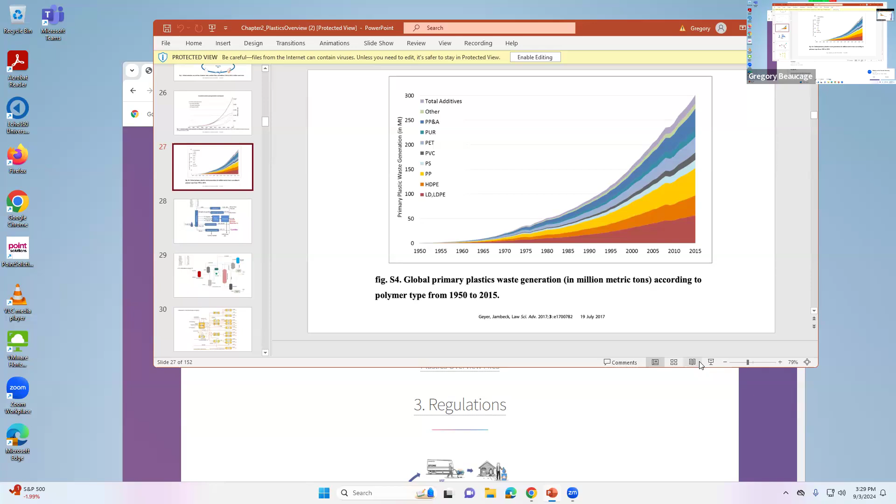So yeah, Anna Burke wanted to talk about a club for sustainability. I forgot the name already. They're having a meeting tonight, and it's free pizza. But no beer.

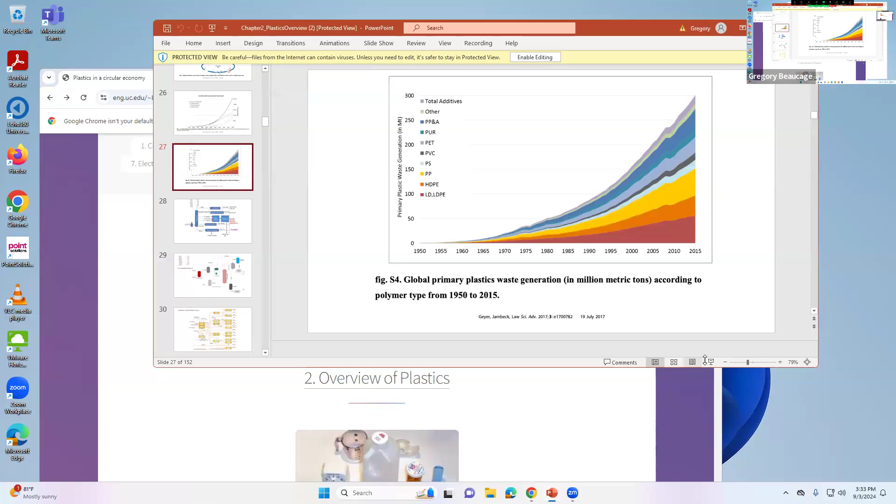All right, so I wanted to do a section overview of plastics. This is the map of the total plastics production, and it's mostly polyolefins.

So a week from this Thursday, Brian Brees is going to come in from Lyondell and talk about polyolefins. I'm going to go through a little bit before that so you know what's going on. And then we'll have a tour of Lyondell at some point pretty soon.

And the Rumpke tour for recycling is October 11th, a Friday at 1:30. But they shut down at noon on Friday, so it won't be operating. As a negative, you don't get to see the stuff flying by, but the positive is you can actually hear the guy, because it's really noisy - seems semi-dangerous since it's an active assembly line. So there's a negative and a positive to having it shut down when we go there, but you can still see quite a bit, I think.

All right, so what I want to do is go through the types of plastic. Again, the polyolefins are going to be the majors - low density polyethylene, high density polyethylene, polypropylene, all the kind of yellowish, reddish colors and all that.

PVC is also more or less a polyolefin, so that adds on to that. You can see it ends up being supposedly 80% of the plastic waste. I think that's because it's only like 50% here in production, since the other polymers are all high turnover packaging materials, less than a year probably, and then they're thrown into waste or recycled. The other polymers, like polyurethane, are used for insulation and coatings and things, so a lot of it doesn't get to the recycle stream.

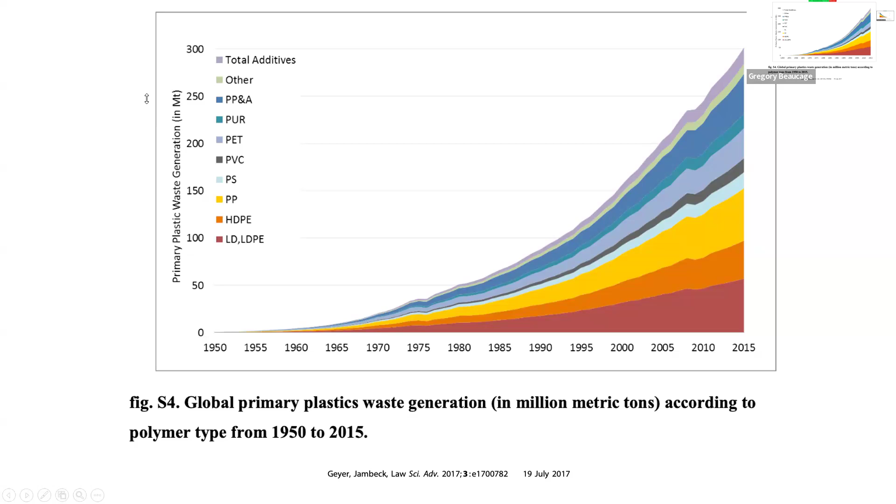What I wanted to do this week is give you—I already went through the petrochemical sourcing for the monomers, basically a catalytic operation to make olefins. Then the olefins are processed to make things like diamines and dialcohols to make condensation polymers like nylon. So basically, olefins are the feedstock to a lot of the different kinds of polymers. It's the same picture: crude oil to kerosene, then cracker to make olefins. So a split of the oil production is being cut off to make plastics.

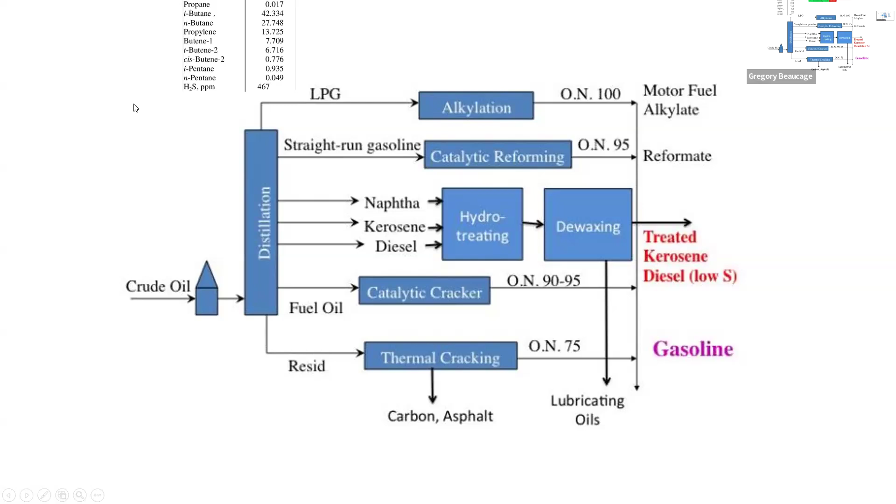In other words, if we continue to use gasoline, we're going to have these cuts. We can adjust it a little bit, but basically you're going to have material that'll make monomers for polymers. You have to get rid of those monomers somehow if you're burning gasoline, right? So that's something to think about—just getting rid of plastic isn't necessarily solving the problem totally.

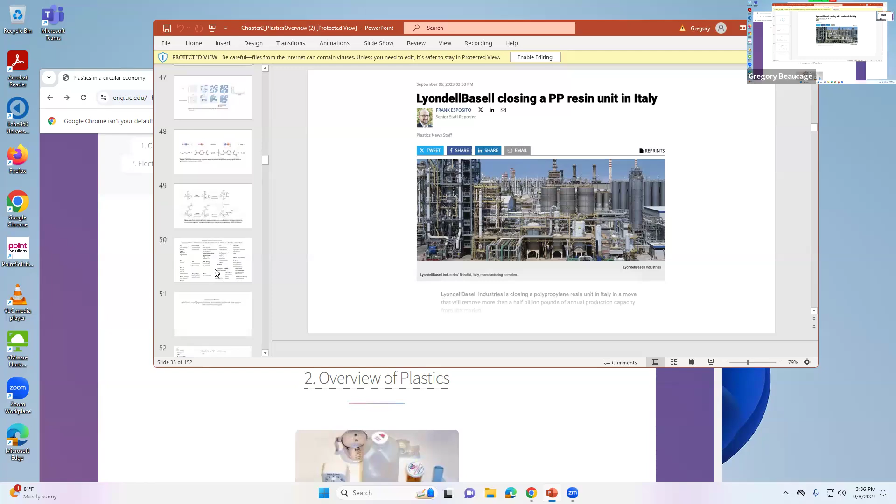Let's see, 50... so anyway, this is off the top of my head, the 21 plastics—I think it's probably fairly comprehensive, so it's a lot. I'd like to go through each one with at least one slide to say how it's made, how it's processed, how it's used, so you have a rough idea of what the picture is. But again, the main things are going to be polyethylene and its different manifestations, polypropylene, and PVC—these three are 80% of what's going on.

PET is the number one that could be recycled—that's like 16% of the waste stream. Polystyrene is not recycled. SBR, the rubbers, are recycled as grind for reuse in a lower grade use. Polyhydroxybutyrate—these are supposedly biodegradable polymers, and these things are not recycled. Pluronics and the other water-soluble polymers, all three of those, and I think most of the other things are not recycled at all, right?

But they're also not used as much, right? These are like electronics polymers, the thermoset polymers that react and become permanently cross-linked material. I didn't put polycarbonate down—I'll have to mark that in. Polycarbonate is a condensation polymer too, and it's not recycled. It's not reused either, because most of it, like if you have a hard plastic such as polystyrene, it's mostly used because it's clear, right?

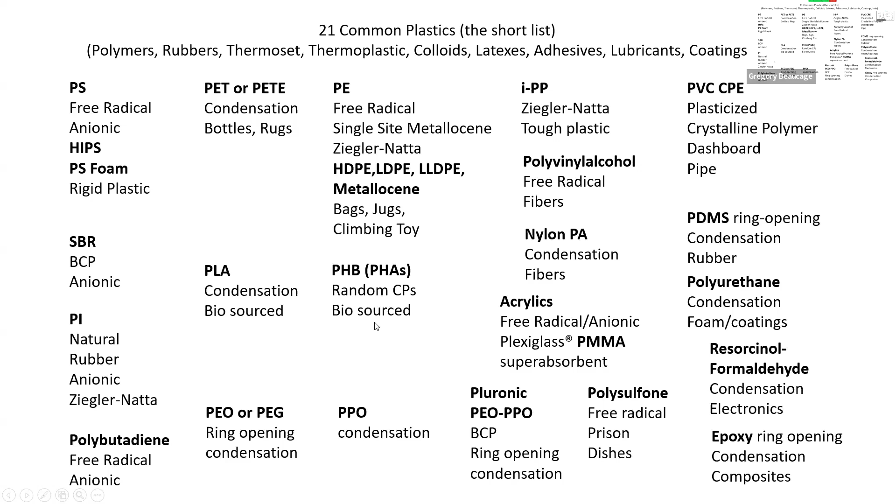Anyway, the acrylic, some of these I haven't gotten to yet, but I have the whole thing. Then the additives are going to be a ton of additives too. Not sure how, it seems like when you go to the different plastics, you're going to have certain ones, like for polyurethane, for SBR rubber, carbon black and silica are the additives they use mostly. And then calcium carbonate's dumped into everything.

So there's a company in Cincinnati that's a Swiss calcium carbonate company. What is it? Yeah, Omya, yeah. They work there, they go over like... oh okay. Yeah, we could get someone from there to talk, I guess, but I have one of my grad students who works there, he's in the analytic thing there. Anyway, it's a good company. Swiss is always good because they have so much money, it's like the money place to go.

Anyway, Titania is like Evonik and DuPont. So big companies make all these additives too, made in train loads. They become kind of a problem when you try to recycle things because you don't want to have additives in the material recycling. So separating the additives from the polymer is a big problem, so knowing what those are is useful. I'm not exactly sure how I'm going to go about talking about additives, but mostly I'm just throwing it in with the polymers so far.

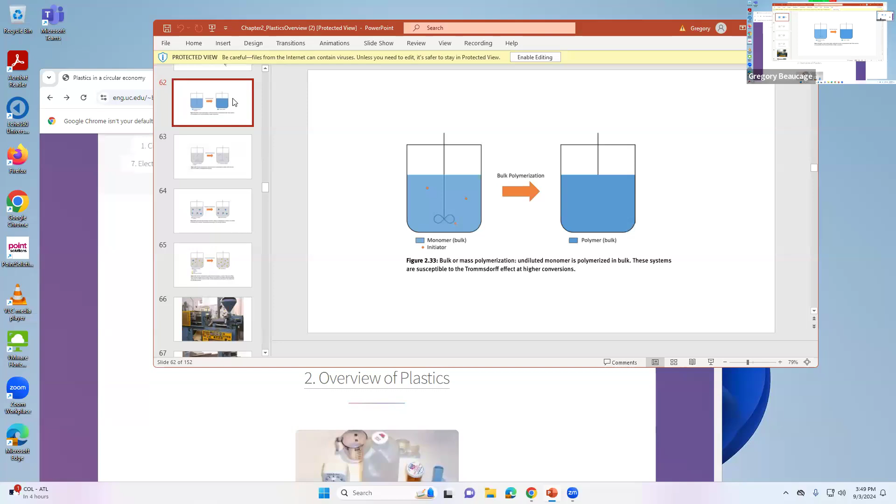But anyway, there's a picture of these kinds of polymerizations in here. Let me see—I should have put it right here. So I'm on page 62, here. This is one of them, showing one of the pictures of this. This is showing bulk polymerization.

Again, the Trommsdorff effect is the problem here, which causes a reversion of the polymerization and limits the molecular weight you can make. This is a solution polymerization where you put in an oil so you end up with droplets of the monomer surrounded by oil. The catalyst, the free radical agent, is put in, then diffuses over to the droplets surrounded by oil, and it ends up making polymer droplets from these large pellets.

Or that's suspension—what is this one? Solution is where you dissolve the polymer in a solvent. So you wouldn't do that with polystyrene because you'd have to use something like benzene to dissolve it, so it would be a mess, right?

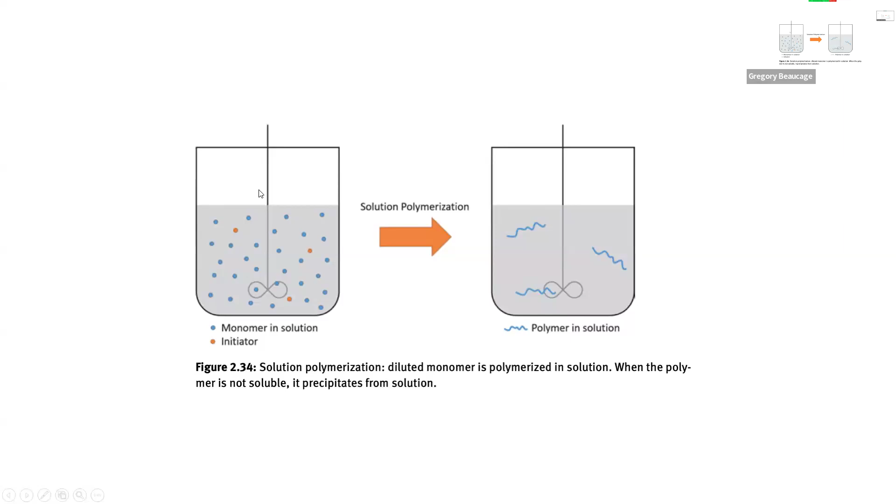But usually you want to do this in water. Water is a good heat transfer agent, it's not toxic, it's got some advantages—you can recycle it in the system, and you're not going to have fumes coming off this. So it's nicer to use water.

And there's monomer droplets with initiator, and there's something that makes the droplets stabilize—basically like another polymer.

Then emulsion is a little bit more fancy. It's just like suspension polymerization, where you have droplets in the water, but the surfactant you put in, the soap, makes these little micelles that are maybe 100 nanometers in diameter, really small. So you have big droplets that are like 100 microns or larger, then micelles 1,000 times smaller. The monomer diffuses from the oil droplets through the water to these little micelles.

And as it's depleted, as the polymerization goes along, the catalyst is also in the water, so it also diffuses into the micelles. There are whole equations to talk about this kind of emulsion polymerization.

They call it emulsion, but it's really a colloidal polymerization because these are colloidal droplets. Emulsion is something more like this oil thing where you put oil in and stir it up. So there's a difference between emulsion and micelle, but it was misnamed emulsion when they first did it, and they just call it that. It's really a colloidal polymerization.

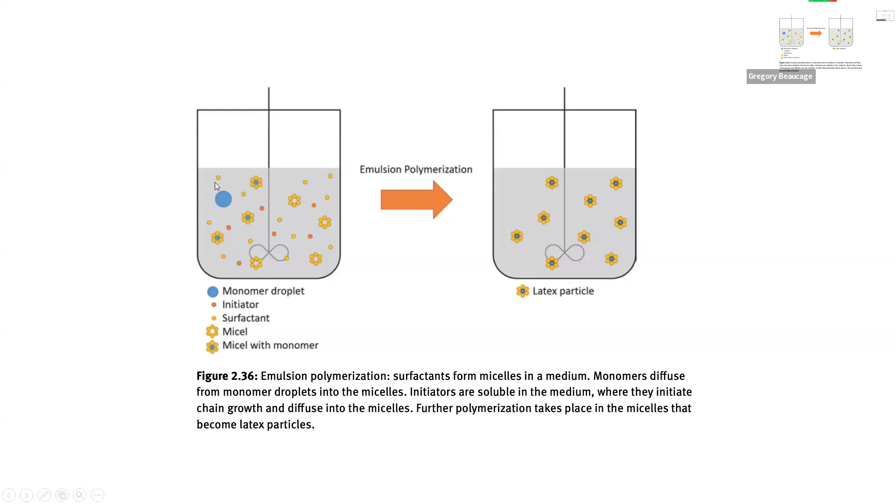If you want a standardized size, they're all exactly the same size. So if you want to use it on a microscope to scale your images, or use it in light scattering to see what sizes you're picking up, you can sprinkle some of that in. A lot of analytic standards are made that way.

So those are three ways to make polystyrene, or I guess I should say colloidal polystyrene. There's a picture here: basically a monomer droplet, and the monomer diffuses to these—there's an order of magnitude difference in size. The initiator is floating around, also goes there, and then it polymerizes.

Again, with these beads you can make a colloidal crystal—this is a hexagonal, like an FCC crystal, of those beads, because they're all exactly the same size. All right, so that's kind of in the wrong place.

But anyway, the free radical polymerization of this stuff is going to give—this is a GPC curve of this. Basically, there's a picture of the GPC in here too. The order of this isn't great.

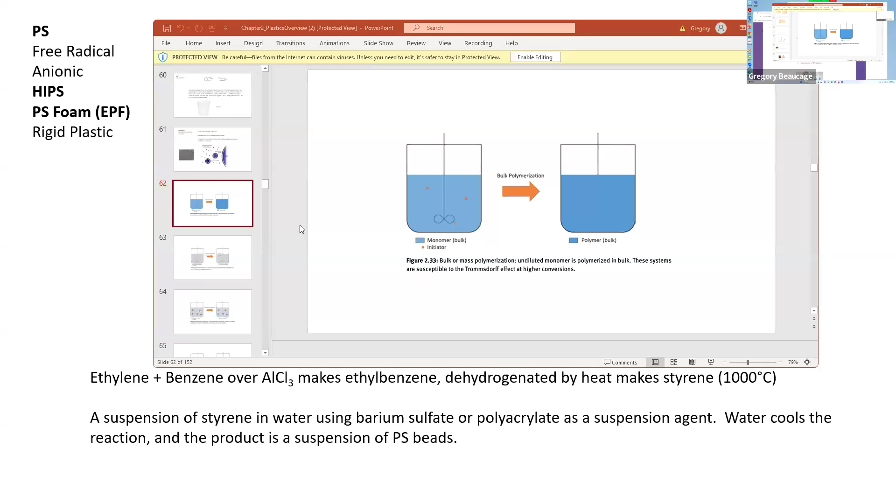So it's not very exciting on a DSC—differential scanning calorimetry. It's a differential between an empty pan and the other pan, measuring how much heat it takes to reach a temperature. When you get to the melting point or crystallization point, it releases heat, so you get a dip; when it melts, it consumes heat, so you get a peak. Basically, dips and peaks mean you're going through melting or crystallization.

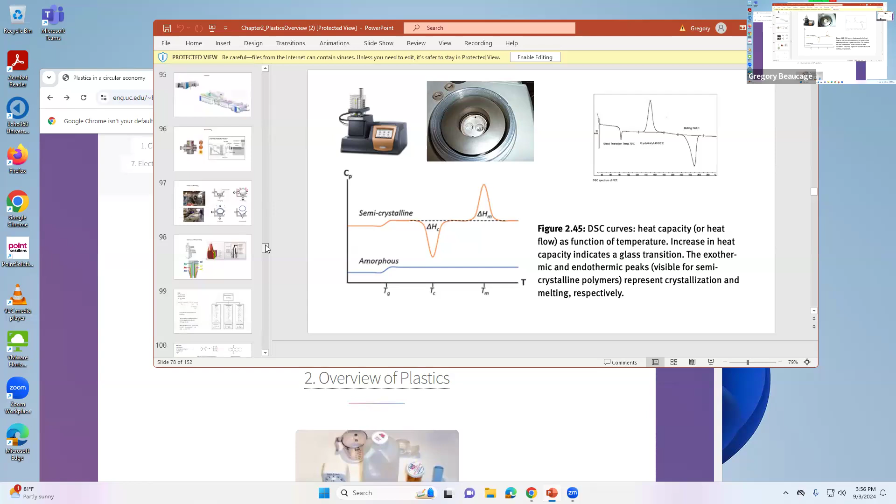So anyway, back to this. Oh, that's a GPC—sorry, that's a DSC, I want a GPC. GPC, I had in here somewhere too. Sorry about that, that was the wrong machine. This is GPC.

GPC is a column made of a polystyrene gel. You take polystyrene and cross-link it with divinyl benzene. Styrene is a benzene ring with a vinyl group on it, unsaturated carbons. If you put another vinyl group on the other side, you get divinyl benzene, which if mixed in with polystyrene, polymerizes just like polystyrene, but it has an extra vinyl group sticking off so it can make a network, making a cross-linked polystyrene. You just mix it in with the monomer.

If you take that and swell it in toluene, it makes a gel, a solid cross-linked gel. Put that into a tube about a couple millimeters diameter and maybe 10 centimeters long, then push through it at high pressure a dilute solution of polystyrene in toluene. The gel acts almost like a plug and won't move at all, so you crank up the pressure to about 50 megapascal, like 500 atmospheres. That's why it's called high pressure liquid chromatography. At that point, it's going to go through.

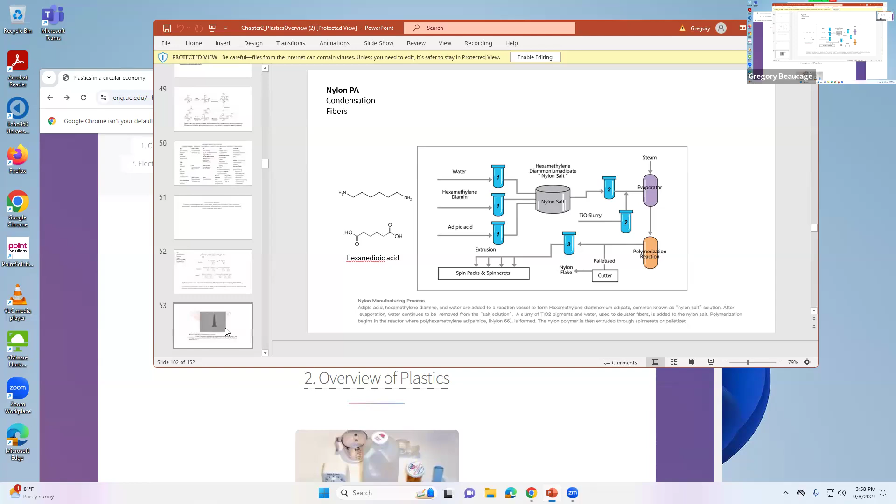From this you can get the mean value, like the second moment, and you can get higher order moments because you have the whole distribution curve. You end up with the weight average, which is a ratio of the third to the second moment, and the number average, which is the mean, the second moment divided by the first. In other words, the average of molecular weight squared divided by the average molecular weight gives the number average, and the cube of molecular weight divided by the square gives the weight average, since the cube is the weight times the squared term, making it the mass average. The number average is just the squared one.

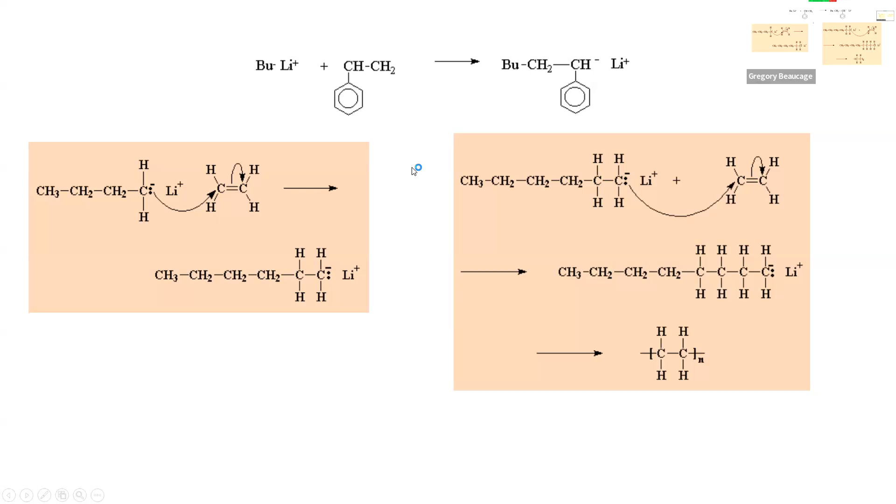So anionic polymerization, once you get anionic, they call it living polymerization, living polystyrene, because it won't stop. Once you run out of monomer, if you add more monomer, it will continue on. So here they made polystyrene, then they add butadiene, which is this guy.

So the butadiene's got two double bonds. It's butane, and diene means two double bonds in it. One of them will pop off here to the anion, and the other one will pop here into the middle. So you end up with an unsaturated chain, right?

So that unsaturated chain, if you put sulfur in, that'll cross-link. So if you want to cross-link rubber, you're going to have unsaturated bonds, and the sulfur will just break that double bond. It can bond with that and another one. So sulfur will make a bridge, and sulfur can bond with itself and make a chain too.

That's vulcanization. You just put the sulfur in, mix it up, heat it up, and it reacts with those, making cross links. However much sulfur you put in, the more sulfur you put in, the shorter the chains between the cross links that you get in a rubber. So this is SBR.

It could be a tri-block too. So you polymerize styrene, then you polymerize butadiene, then that runs out of butadiene, then you put styrene in again. So you get SBS, like a tri-block copolymer. You can make as many blocks as you want, tune it to whatever you want.

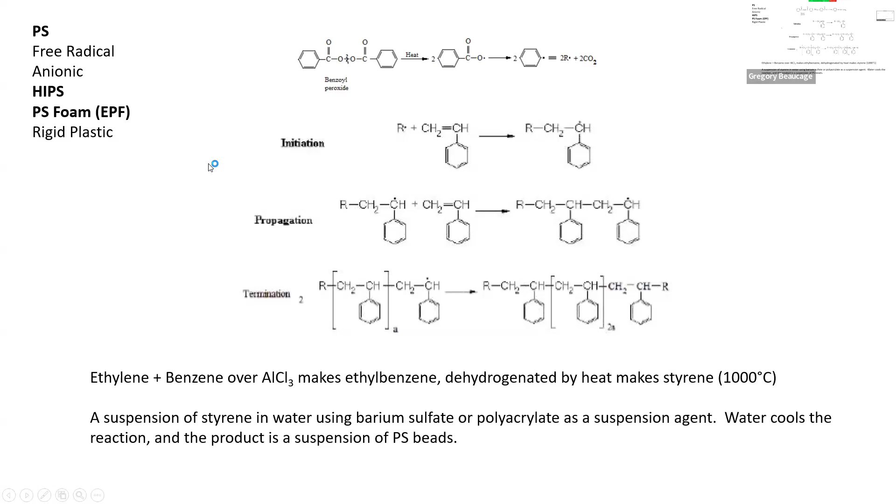So anyway, all you have to do to make styrofoam is heat it up, because there's still some residual styrene monomer in it, or you can soak it in hexane or some other solvent like that. You just put in a very small amount because there's a big change between liquid and vapor—a huge volume change. A little bit goes a long way.

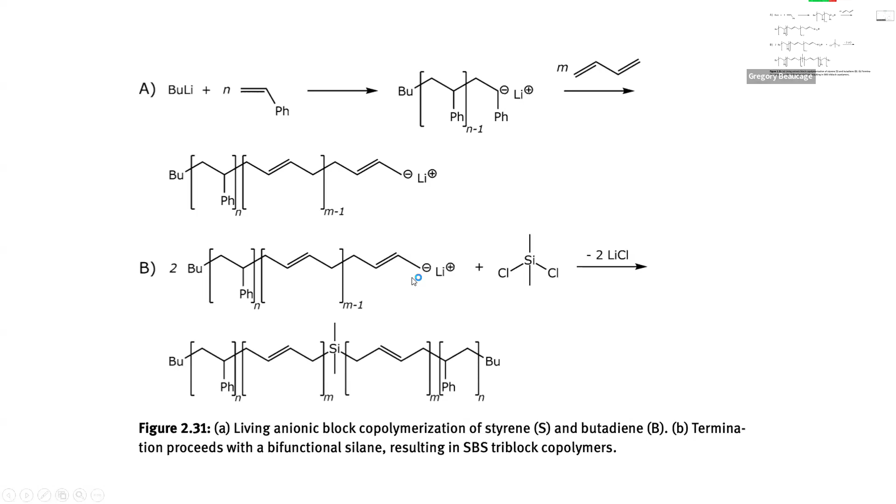So you're going to have some kind of... let's see, what is this one? Terminating with the bifunctional silane. This is when you want to terminate the anionic polymerization—you put this silane in to kill the reaction. This is the termination step. That's showing, in broad terms, what anionic polymerization would look like. This would be free radical. That's anionic monodisperse. This is block copolymer anionic.

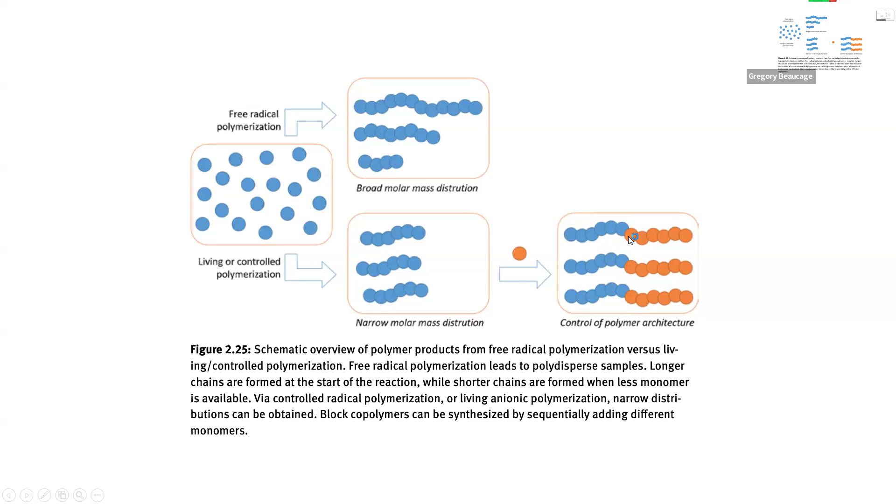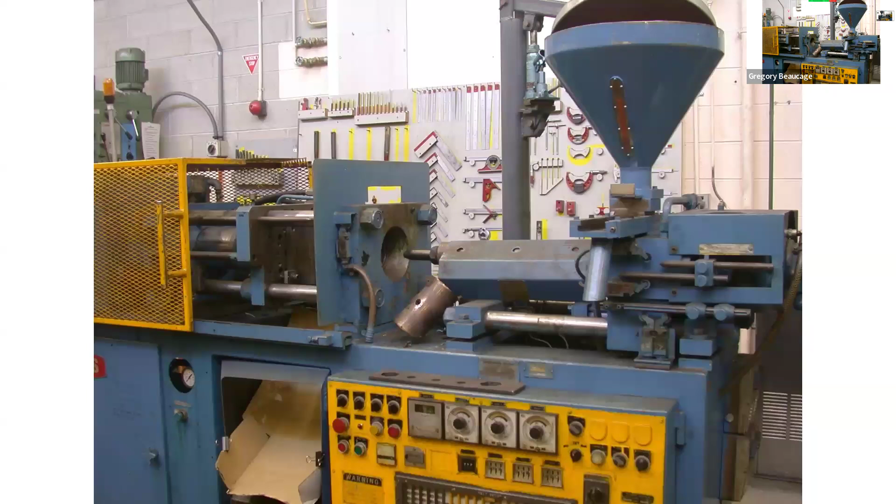ABS is the Lego bricks thing. So this isn't really recyclable. It's made by copolymerizing styrene and acrylonitrile. Acrylonitrile is this monomer—the C triple bond N sticks off, and this vinyl polymerizes, so you get this nitrile side group on it, which makes it tougher somehow, because I think it hydrogen bonds or somehow interacts with other groups.

And then they blend it with butadiene, the same thing as in SBR, where the double bond makes an unsaturated chain, polymerized with acrylonitrile, and you mix this stuff all together. So there's no possibility of recycling this. I mean, you could burn it or pyrolyze it to make oil or something. So anyway, that's ABS—a fairly complex process—and you end up with Lego bricks.

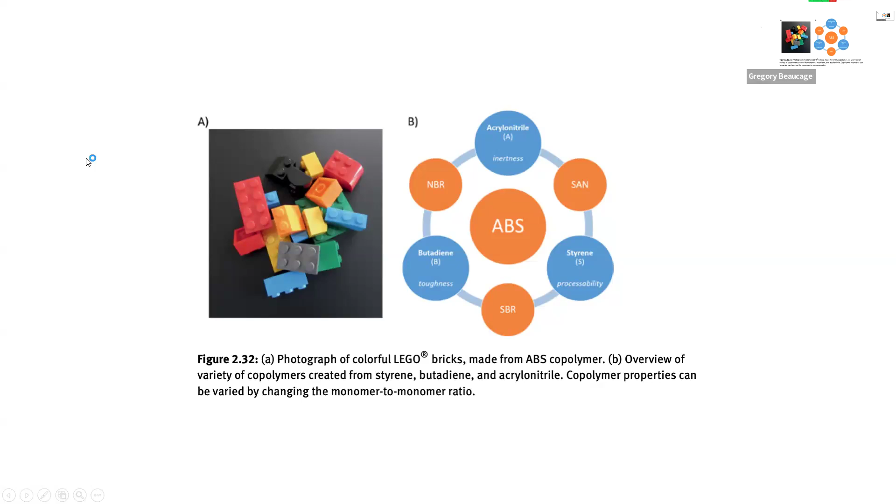Anyway, this is another case similar to ABS, but it predates it. ABS is from the 1970s-80s, and this HIPS is from the 1950s-60s, I think. This popularized a term called phase inversion. You polymerize styrene and butadiene together by free radicals—the cheap, easy way to make things.

And then you put it in and stir it—it depends a lot on how rapidly and vigorously you stir it. If you stir too little, it doesn't work. If you stir too fast, it doesn't work. During polymerization, it goes from a butadiene matrix with styrene monomer to a styrene matrix with butadiene monomer.

With all that mixing, the butadiene domains have little styrene particles in them—rubber domains with little glass reinforcement. The rubber makes the styrene craze a lot, so it ends up kind of white, like these plastic mouthwash cup things—polystyrene with butadiene mixed in this way, high impact polystyrene.

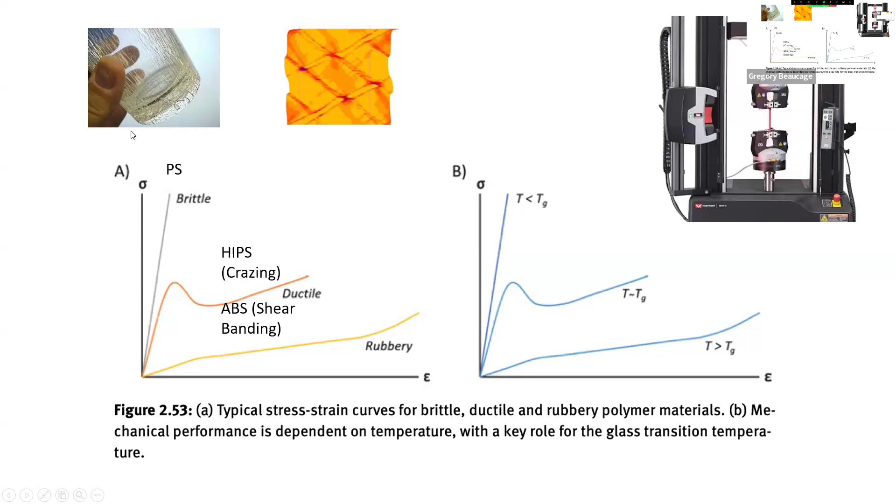And then if you get it too soft, it'll just be a rubber and it just deforms like that - it doesn't have a yield point and it stretches out. So those are the three kinds of mechanical behavior of plastics, and they're basically tuned in polystyrene.

Anyway, so we're in time. It's not 4:30. It is 4:30. Yeah, all right.

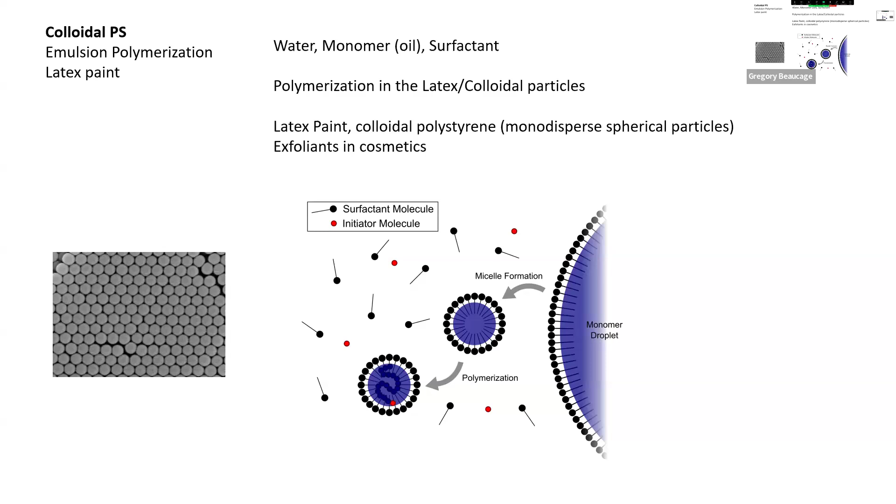So that covers ABS, HIPS, colloidal PS, then the three polymerization routes. Then this is like...

So the Scotch tape container, which I don't have a picture of here, basically is going to be made on a machine like this - it's an injection molding machine. This is a particularly dirty one.

I went to a place where they made these - the speed of these is sometimes fairly fast, like it'll be going ka-chunk, ka-chunk, ka-chunk, ka-chunk. So maybe like 20 things a minute that it's making.

But there used to be a plant out on the east side somewhere where they were making lenses for satellites, for optical cameras, like spy satellites or something. They would take like 10 minutes to make one part because they didn't want flow lines - they were injecting PMMA and didn't want flow lines that would make it birefringent, so light wouldn't go through right away.

Basically the process would be so slow it would spit out one part at a time, and they had a whole factory - I think it was Corning or someone doing this - with maybe like 80 or 90 of these machines doing that all day.

So basically, these injection molding places are kind of interesting to see. They'll have a hopper, but basically there's what they call a Gaylord, which is like a big box of plastic. There's a vacuum system that pulls these pellets up, and then the pellets run over to feed into this hopper. So there'll be a bunch of these Gaylords with kind of elephant nozzles pulling the pellets up, and on the ceiling you'll see all that heating tubing or air conditioning tubing with the pellets flying through it, and it comes down into this hopper and feeds into it.

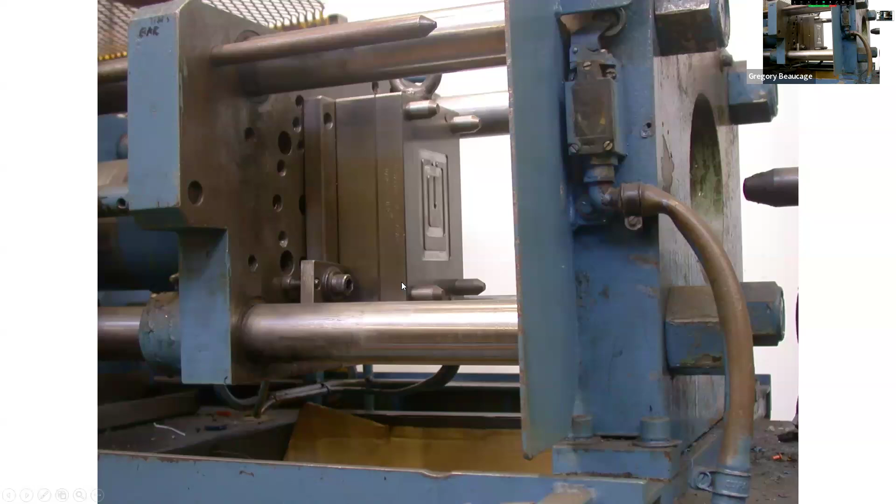So this thing costs like $200,000. The molds aren't cheap - basically they think they're going to make thousands of plastic parts, maybe millions, from this one mold, because it costs a lot of money. The rest of the machine's like junk, but that mold is expensive.

So there are certain shops that make these molds. There's a whole industry of just making molds for injection molding - there's a whole business to do that. And then there's an industry in running these kind of injection molding shops. There's an industry in making the pellets. So there's a bunch of different parts of the value chain in the plastics business that's going on, that's all tied together.

This is a video of this.

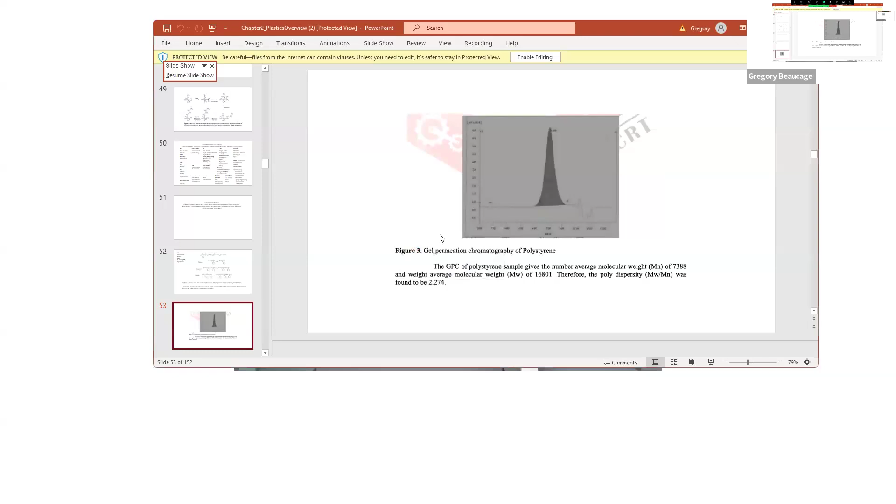I think it just rejected me. Did something - no. This is the same thing. I'm gonna do that. Oh, it's not even telling me what it was. Slide on. Oh, there, that's good. This is 5 minutes in. I got a few videos that seem like they were local. Let me change my mind. Let's see what this does.

Injection molding is the most common method for mass manufacturing plastic products. Examples include chairs, toys, cases for consumer electronics, disposable cutlery, and my favorite, Lego bricks.

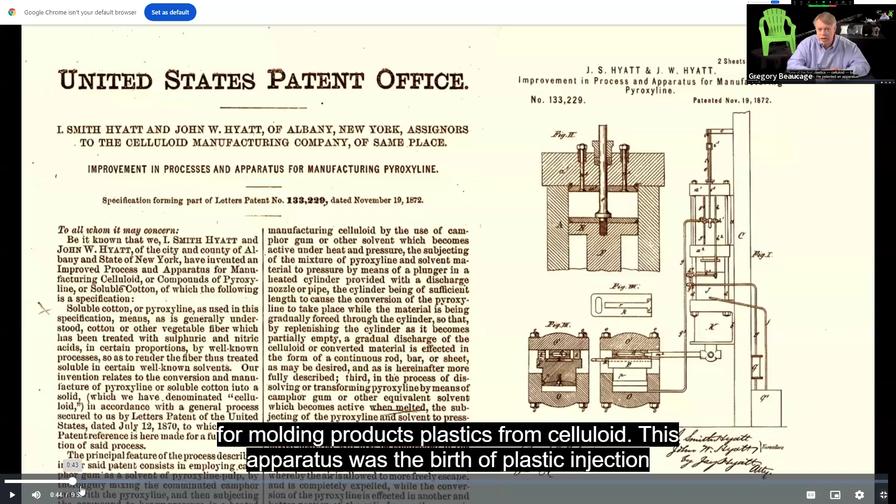Injection molding was invented to solve a problem for billiards. Oh, it's - in the 19th century, billiard balls were - alright, we're going to skip ahead. Da-da-da-da. Da-da-da-da. All right, here.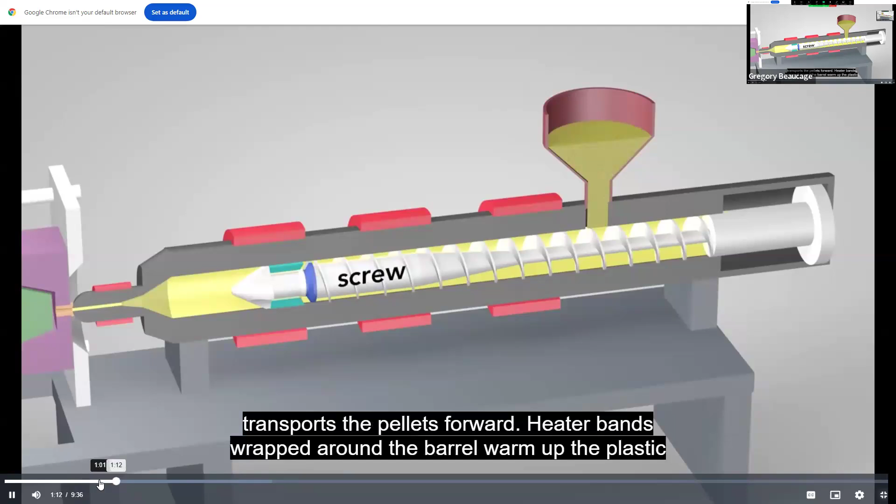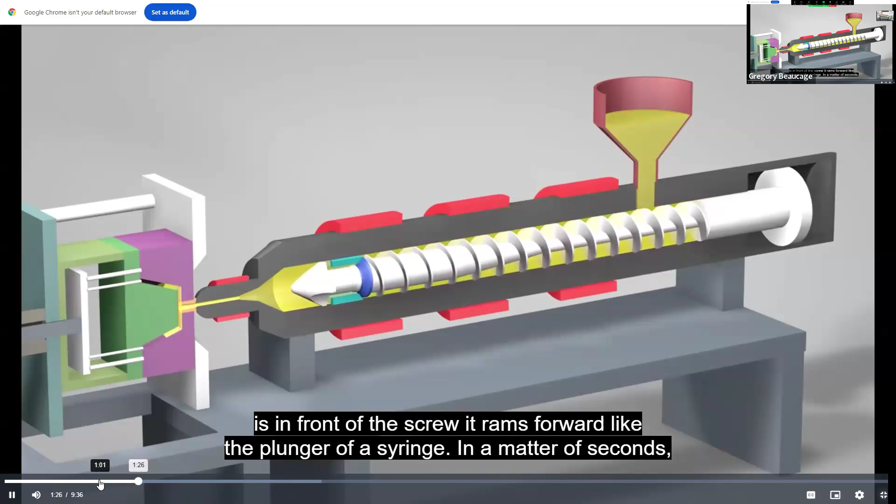The clamp: plastic pellets in the hopper feed into the barrel of the injection unit. Inside the barrel, a screw transports the pellets forward. Heater bands wrapped around the barrel warm up the plastic pellets. As the pellets move forward by the screw, they gradually melt and are entirely molten by the time they reach the front of the barrel. Once enough molten plastic is in front of the screw, it rams forward like the plunger of a syringe. In a matter of seconds, the screw injects the molten plastic into the empty part of the mold called the cavity image. The plastic solidifies in under a minute. The mold opens and the part is ejected. The mold then closes and the process repeats.

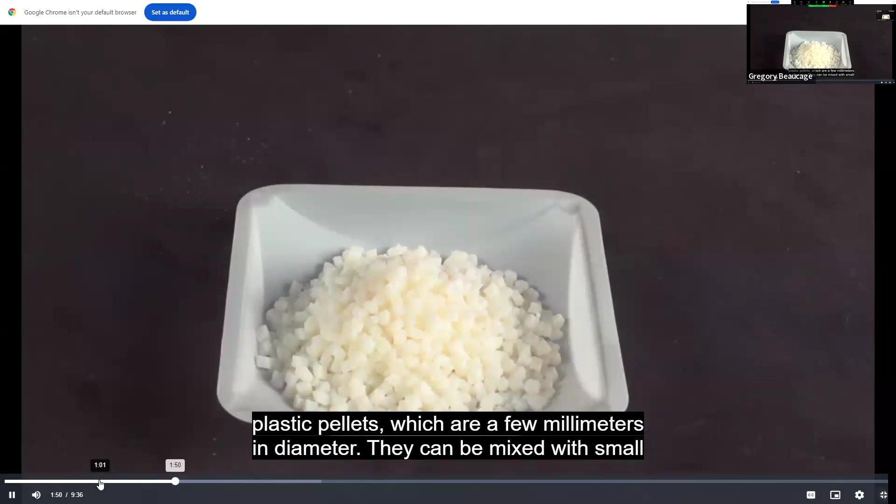All injection molded objects start with these plastic pellets, which are a few millimeters in diameter. They can be mixed with small amounts of pigment called colorant, or with up to 15% recycled material, then fed into the injection molding machine.

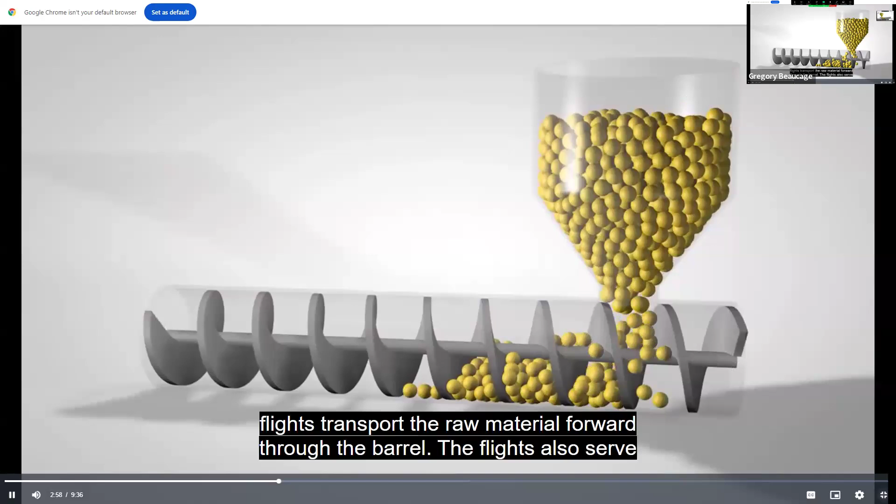The screw has flights that wrap around the shaft. As the screw rotates, the flights transport the raw material forward through the barrel. The flights also serve to mix the plastic. The screw action agitates the melting pellets within the flights to create a uniform mixture. And third, the screw action itself heats the plastic throughout.

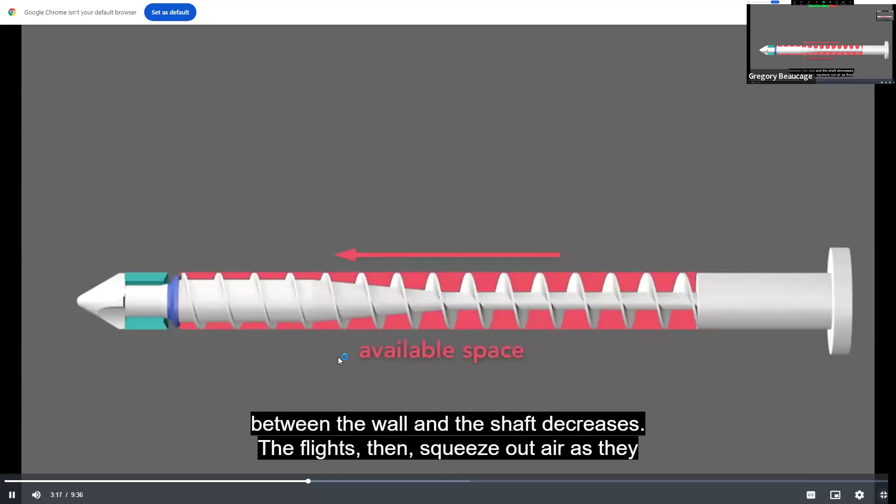The shaft's diameter increases along the screw so that the distance between the wall and the shaft decreases. The flights then squeeze out air as they move the plastic forward, and they shear the pellets and press them against the barrel's wall. This shearing creates friction and so heats the plastic throughout. This screw-induced shear supplies a majority of the heat needed to melt the plastic, between 60 and 90%, with the rest from the heater bands.

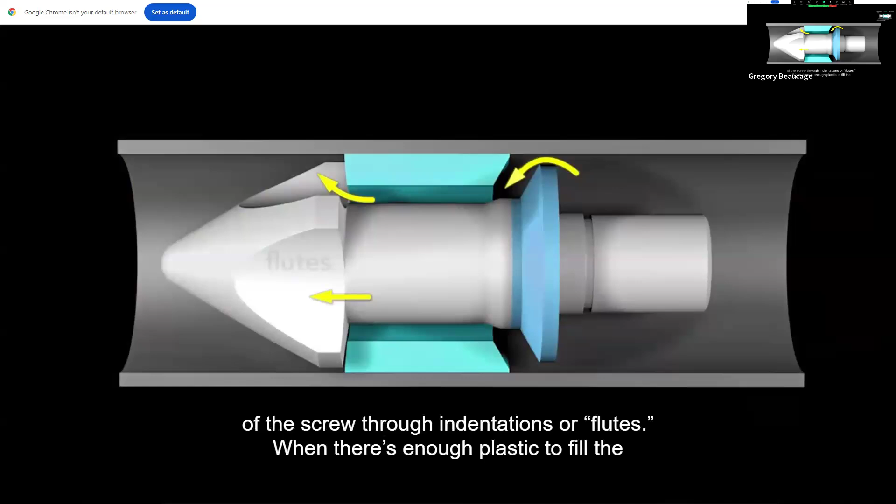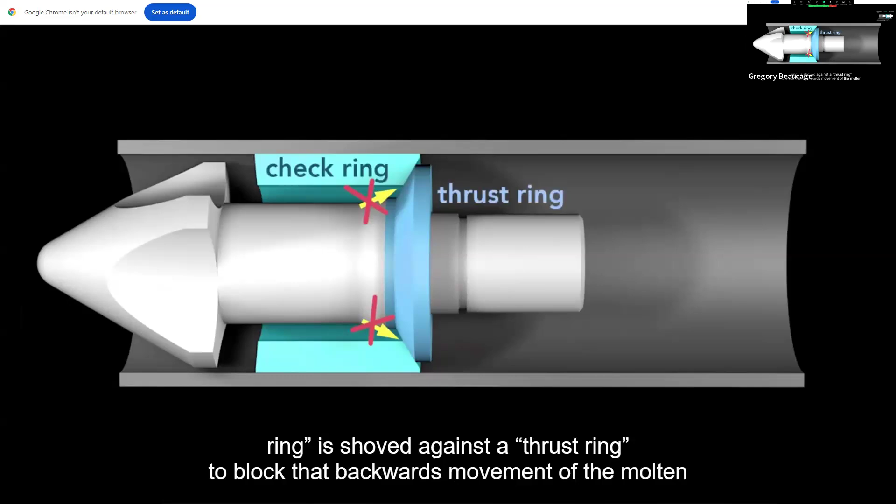The molten plastic flows past the front of the screw through indentations or flutes. When there's enough plastic to fill the mold at the front of the screw, it rams forward like a plunger, injecting the plastic into the mold. The plastic cannot flow backwards because when the screw pushes forward, a check ring is shoved against a thrust ring to block the backwards movement of the molten plastic. This forces the plastic into the mold.

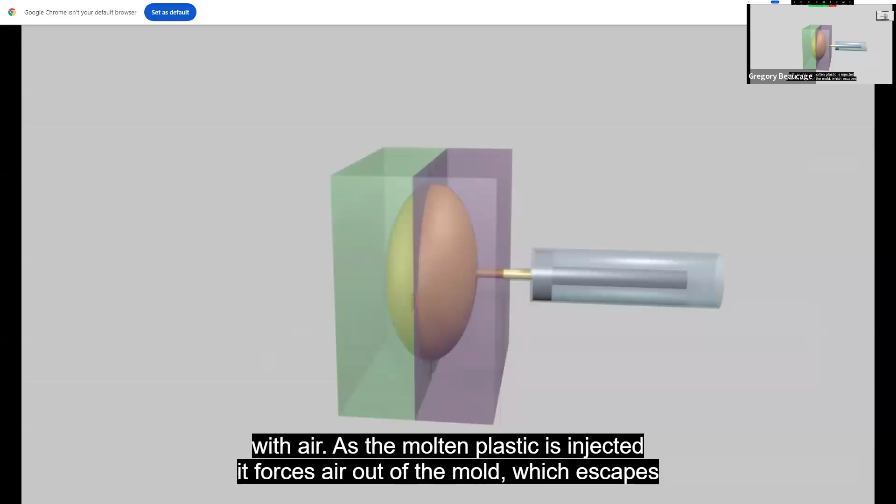Initially, the cavity is filled with air. As the molten plastic is injected, it forces air out of the mold, which escapes through vents. These vents are channels ground into the landing surface of the mold. They're very shallow, between 5 and 40 microns deep. The plastic, which has the consistency of warm honey, is too viscous to flow through the narrow vents.

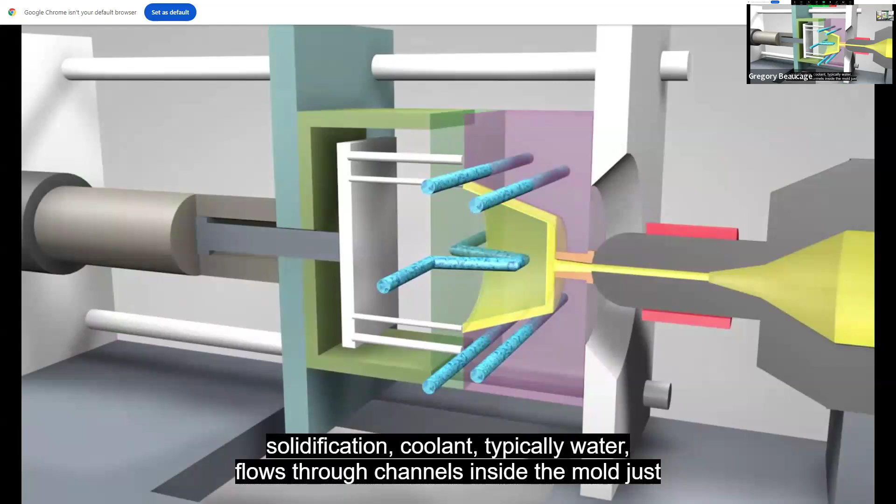Maybe this is too much detail. Anyway, all right, so he shows, this is fun.

If you look closely, you will see circular ejector pin witness marks on molded products. For example, this chair on its bottom has an array of witness marks. When the part drops from the mold, an operator has to remove the sprue, that section of plastic that connected the injection unit to the mold. The sprues are manually twisted or cut off the part.

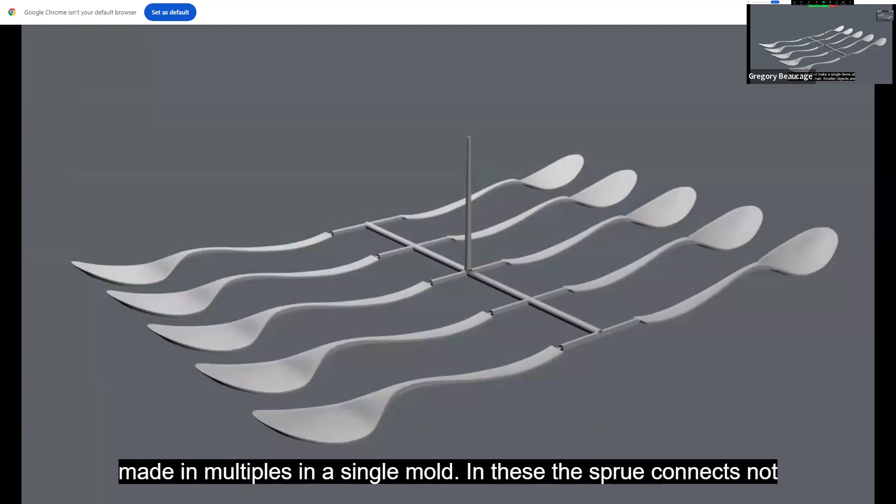Sprues are attached to objects only in molds that make a single part at a time, like a chair. Smaller objects are made in multiples in a single mold. In these, the sprue connects not to the part itself, but to a network of distribution tunnels called runners. The runners fan out from the sprue and connect to each cavity in the mold via a small, typically rectangular entrance called the gate. You can see the gate on plastic cutlery.

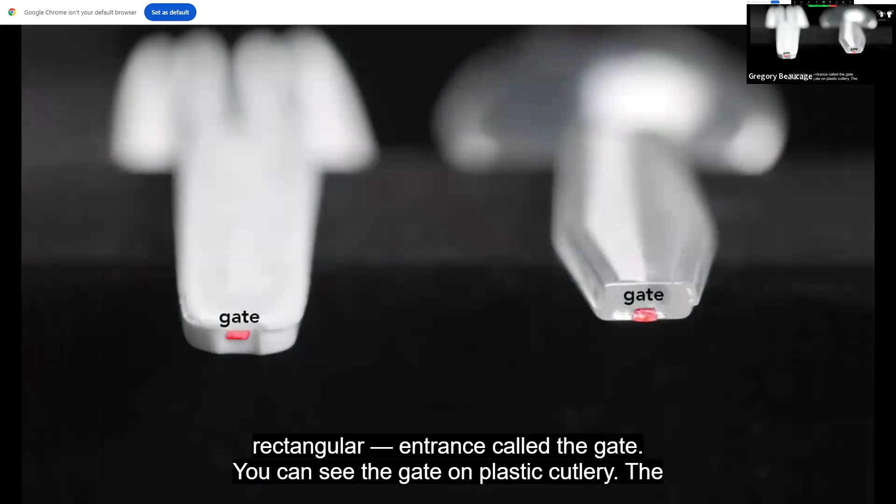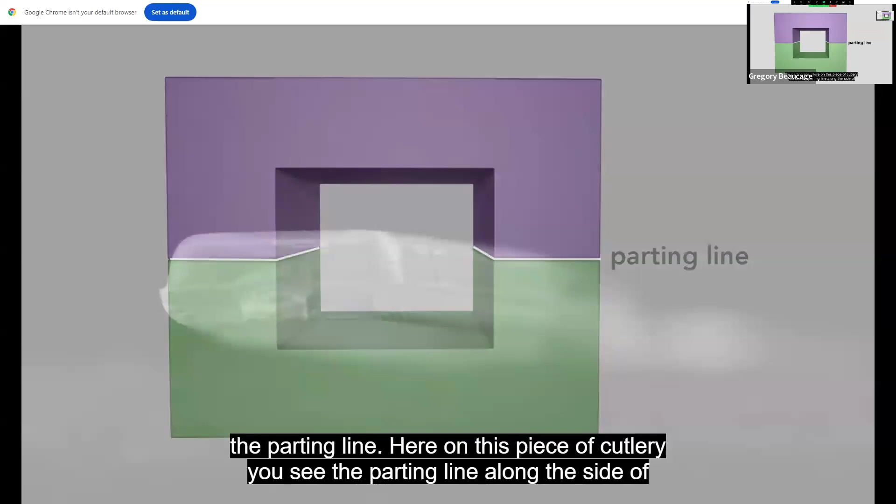The parts for model planes typically come still attached to their runners. Molds always have at least two parts, and where the parts of the mold meet is called the parting line. Here on this piece of cutlery, you see the parting line along the side of the fork. When mold halves close, they are never perfectly aligned, nor do they have sharp corners. This creates a noticeable parting line on the molded object.

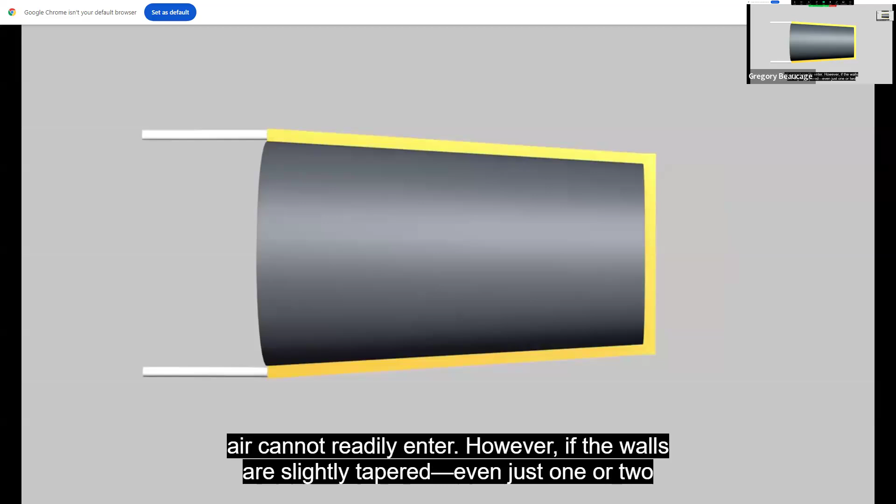Another very important aspect of mold design is the draft angle. If a part has walls that are exactly 90 degrees, it will be very difficult to eject because its inner walls will scrape the core half of the mold. Also, the vacuum will be difficult to break because air cannot readily enter. However, if the walls are slightly tapered, even just 1 or 2 degrees, it becomes much easier for the part to be removed because once the part moves slightly, the walls are no longer in contact with the core half and air can rush in.

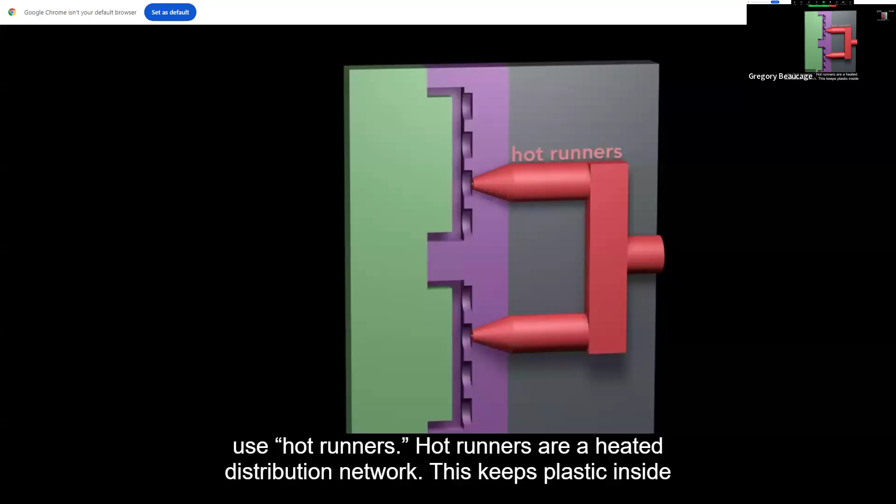One impressive example of injection molding is the Lego brick. You can see the injection point in the middle of a stud, but this is not from a gate or a sprue. The Lego molds use hot runners. Hot runners are a heated distribution network. This keeps plastic inside the runners molten while the plastic in the mold solidifies. This leaves no gates or sprues to be removed.

Once the mold is done, the bricks are ejected, ready for use. The downside is that this setup is more expensive than a traditional cold runner system. On the bottom edge of the brick, you can see ejector pin witness marks.

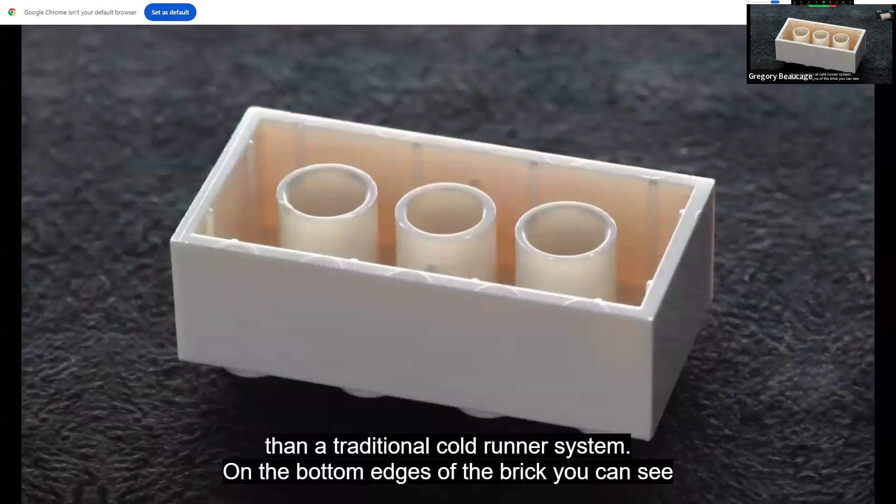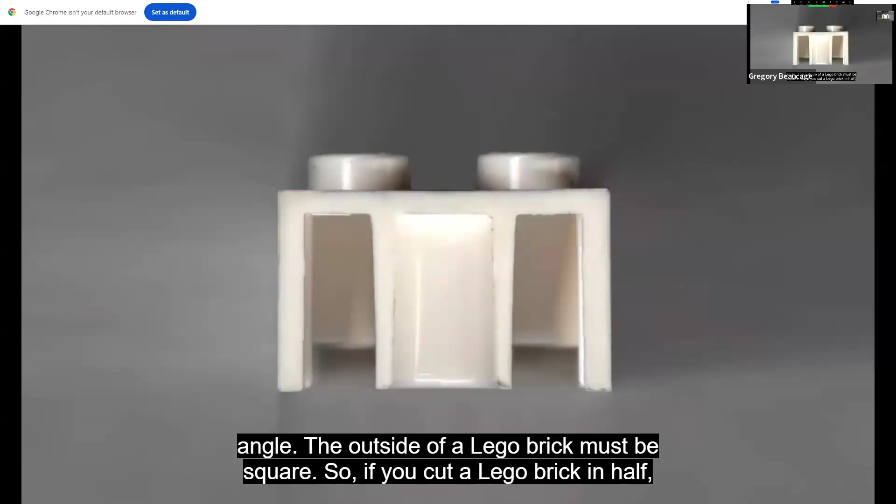What's most clever to me is where Lego designs their draft angle. The outside of a Lego brick must be square. So if you cut a Lego brick in half, you can see that these inner supports are thicker at the top than at the bottom. Lego bricks have a draft angle of about 1.5 degrees. This helps the ejector pins push the brick off the mold.

The core half and the cavity half of Lego molds are designed so that the parting line is at the bottom edge of the brick. This hides the parting line.

Look around you and see how many injection molded objects you can find. Likely the device you're watching this on has injection molded parts. You should be able to find ejector pins.

That's probably good. But yeah, we could probably quit now, I think, right? So I wanted this, I thought that was worth seeing. Anyway, so yeah, let me quit there.